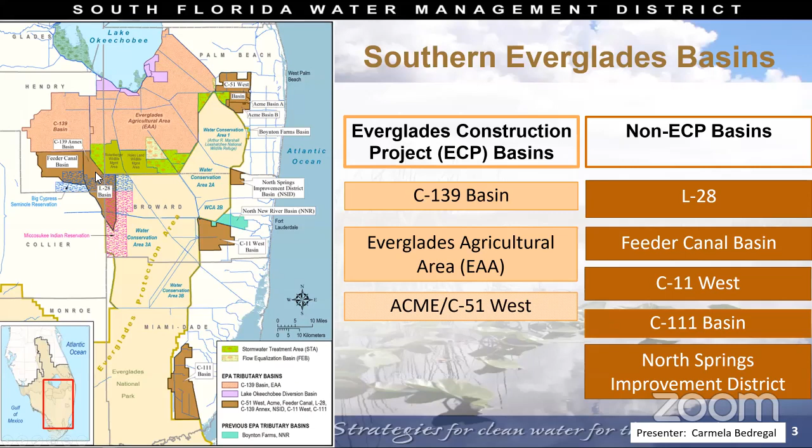To place these projects into the context of all the Southern Everglades tributary basins, please take a look at this map. The Lake Okeechobee is here, the Everglades Agricultural Area to the south, and to the southwest is the C-139 Annex Basin. The Flow Equalization Basin, the Sam Abiaki Prairie Restoration, and the Western Everglades Restoration Project, WERP, will benefit 3 of the Southern Everglades Basins. The C-139 Basin, which is located here, the L-28 Basin, and the Feeder Canal Basin.

So how will water quality be improved? And for that, we need to look at the hydrology of the Western basins, how water flows from one basin to another. So this map is similar to the previous maps that you have seen, except that it indicates main surface water structures and canals. And let me get my pointer option here. So the C-139 basin to the north is here, and the southern portion of the C-139 basin flows to STA 5/6 from the north and from the west.

Next is the Feeder Canal Basin. The west part of the Feeder Canal Basin flows to the southeast and discharges from the area at the west weir. The north part of the Feeder Canal Basin flows south and discharges through the structure PC-17A. Discharges from the north of the Feeder Canal Basin and the west of the Feeder Canal Basin mix and travel through the Seminole Big Cypress Reservation, finally discharging from the Feeder Canal Basin at S-190.

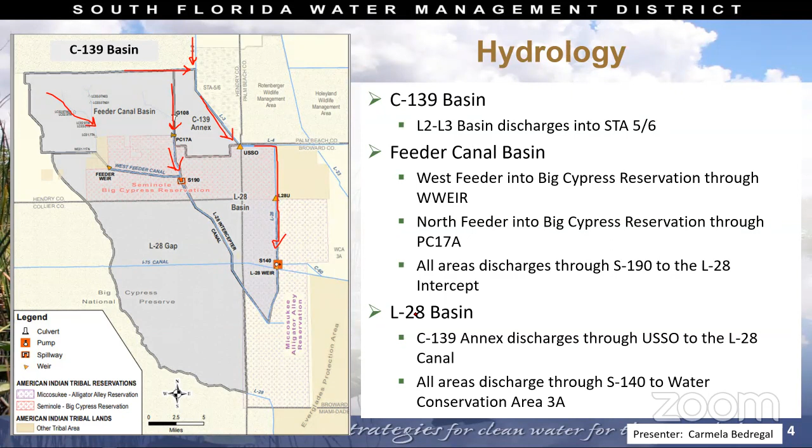Finally, let's talk about the L-28 Basin, where the C-139 Annex property is located. The C-139 Annex discharges south, and from there, it discharges into the rest of the L-28 Basin at the USSO structure. Water further flows south and discharges to Water Conservation Area 3A at the S-140 structure. The projects that you will hear next will reroute or improve the conveyances that you see on the screen, resulting in water quality improvements.

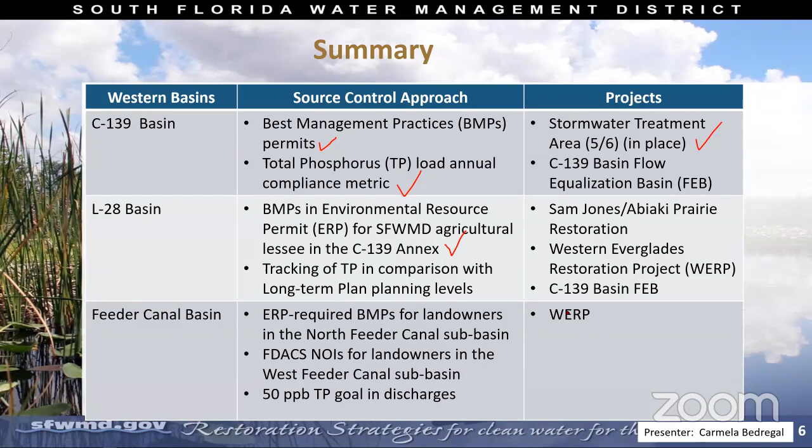So this completes my introduction. Additional detail on the activities conducted by the various entities in these basins is presented in the South Florida Environmental Report. And I don't know if I can take any specific questions or comments at this time, or we can leave those for the end. Thank you.

Thank you. Are there any board members who have a question? If you do, raise your hands and I'll recognize you. Okay, seeing none, let's move on. Great, thank you.

And next we're moving to current and future projects with Jesse Van Eyck, who's the lead engineer and construction manager for the Engineering and Construction Bureau. Jesse? Good afternoon, governing board members. Thank you for your time and opportunity to present on this great project. My name is Jesse Van Eyck. I am a lead engineer and construction manager in the Engineering and Construction Bureau. I'm also the project manager for the C-139 Annex Restoration Project that we'll be discussing today.

First off, one of the first things you'll notice that's different is sometimes you hear C-139 Annex Restoration Project and the Sam Jones Abiaki Prairie Project. I'll clarify that a little bit later in the presentation, but I do want to acknowledge that the screen says something different than what I just said.

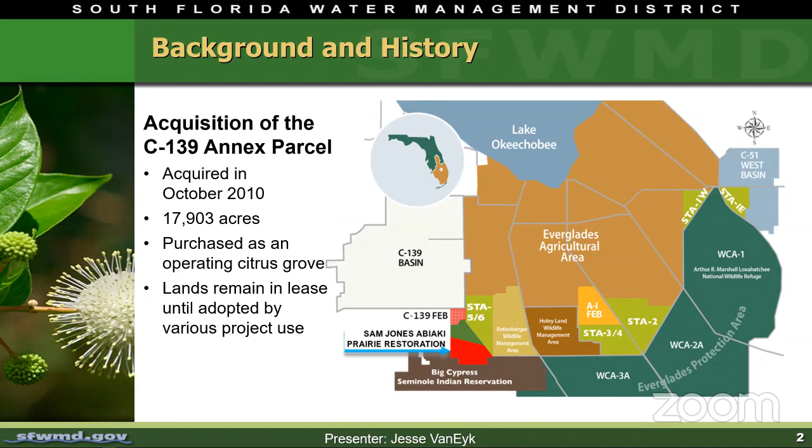That green area is labeled as leased agricultural lands. And as I said before, those are citrus groves that were remaining in lease until we can appropriate those lands for another use. And one of those other uses right now is a potential STA under the Western Everglades Restoration Project. So that green area is about 6,600 acres that's available for future land use. And the Sam Jones Abiaki project is about 7,800 acres.

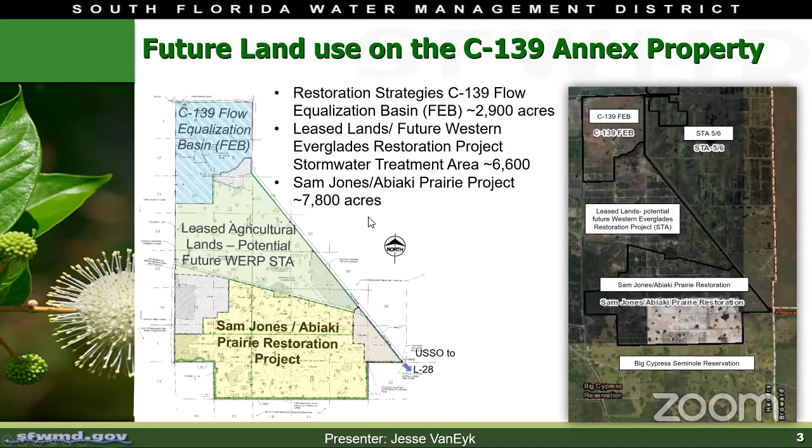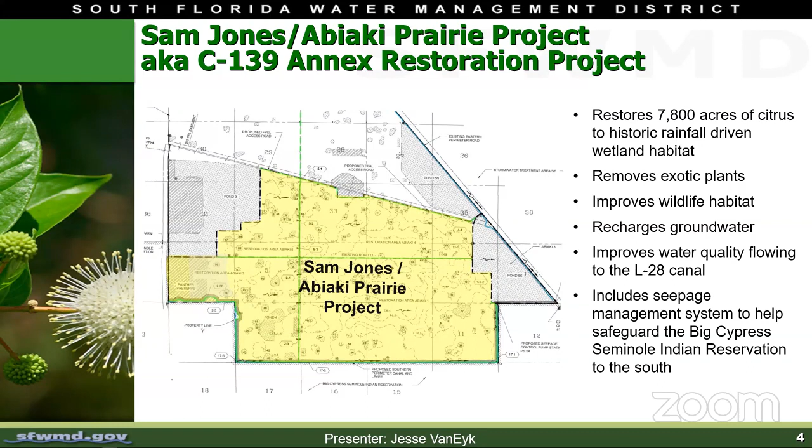And that came straight out of the fall 2013 volume of the Ah-Tah-Thi-Ki Quarterly magazine. This is a tribal magazine put out by the Tribal Museum. It's primarily located on the Big Cypress Reservation.

So who was Sam Jones? Sam Jones was kind of like a spiritual leader for the tribe. He was a leader during the Seminole Indian Wars, and he was notorious because he refused to surrender to the U.S. Army during the wars, and he was actually never caught.

So he was able to safeguard a number of people from the U.S. armies and move them out of sight and really kind of keep the distance. So for that reason, he became a legend in tribal history. And so we're honored to have this property named after him.

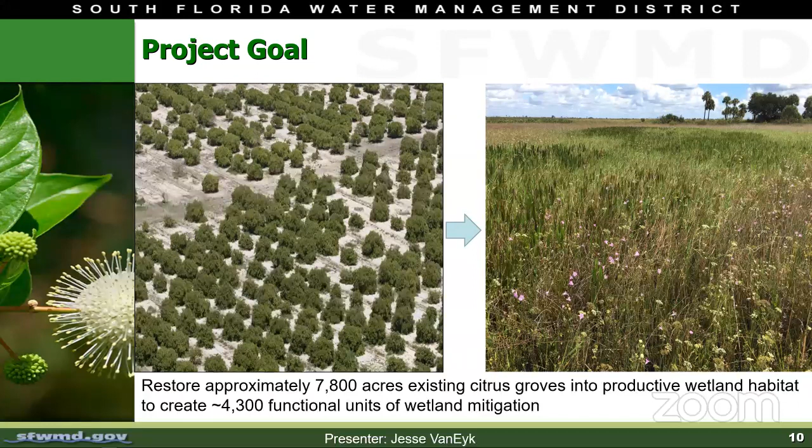I say that because by the time we're done with this project, we will have in some way had human contact with just about every square inch out there. This is a restoration project. So we literally have to walk this by foot, turn each bed over by hand practically, and replant this site. So it's quite involved. And that's really why I want to focus in on what the scale of this project is. Because after you look at these things on paper a few times, you start to lose that perspective of size.

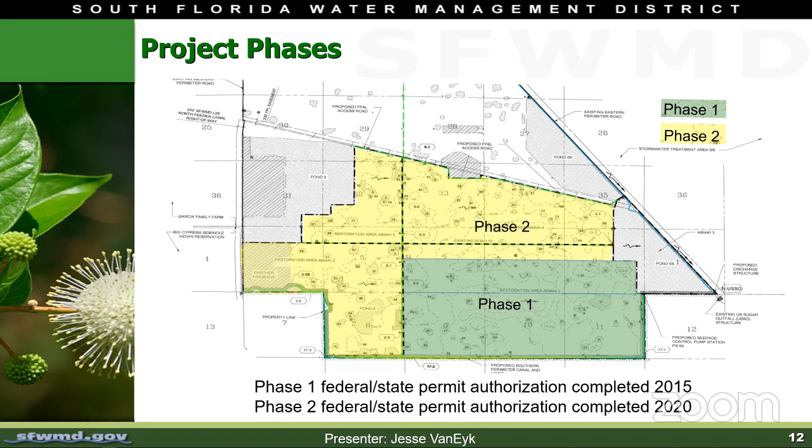And while we were doing that, we also were applying for and coordinating with all the various agencies to obtain our permits by 2020, just recently completed this year. And that's really important because this has taken us a very long time just to make sure we coordinate and we get it right. So we started in 2013 and have gone through this all the way to 2020, 7 years of permitting.

So planning approach, Citrus Grove to a restored wetland. I'm not going to go through every step here, but this is to give you an idea what it takes to take a citrus grove and turn it into a wetland. We have about 27, 28 steps here outlined. And that phase 1 effort took us to step 18. So in the 5 years that we've been working in phase 1, we got to step 18. And now that we have our permits for phase 2, we'll take it through step 27 and we'll repeat this step for every acre that's out there.

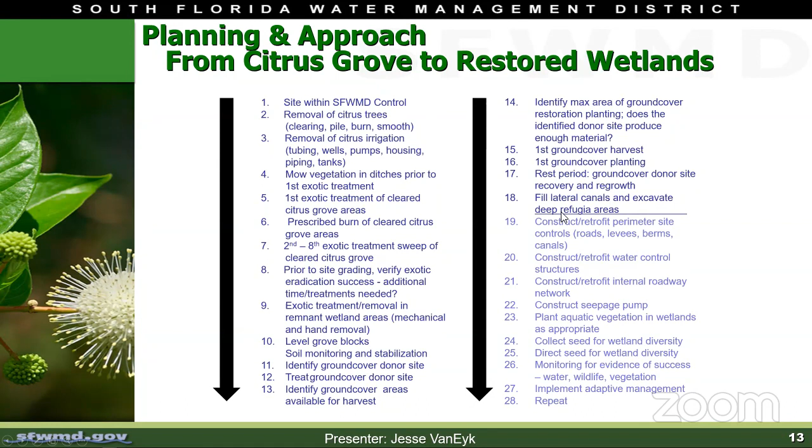So what goes into this overall design that's coming forward in phase 2? Well, in phase 2, we'll build our seepage management system, which will include a seepage pump station, as well as 3 step-down weirs and a road at the north end of the property, which is that dotted blue line at the top. Those features will essentially bound the project and give it some walls. And those walls will contain the restoration area. To do that, we'll also have to redivert some water that came into this area, which I'll cover a little bit later.

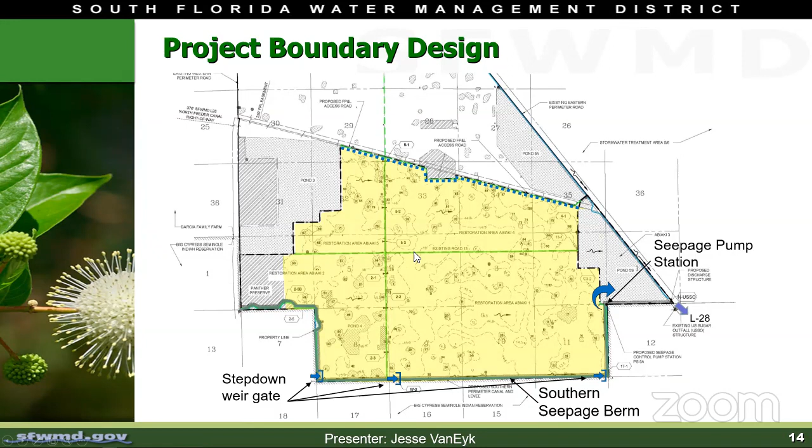On the inside of those restoration components, we have this slide again, which I showed you earlier, phase 1 and phase 2. On top of that, we have these restoration areas. As I mentioned earlier, phase 1 was just a component of the project. And you can see in restoration area 1, or Abiaki 1, that the green area doesn't quite fill in this whole Abiaki 1. We have a little strip left that we need to do, as well as build some of that infrastructure on the south end. So again, that was one piece of the overall puzzle.

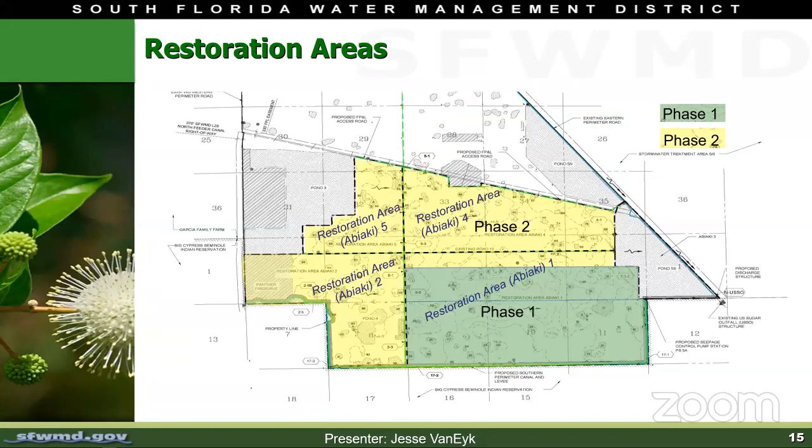I mentioned we had to redirect some water. While the FEB is up here at the north end, I'm not going to focus on that. That project is already underway, and it's going to re-divert this water that's currently up there. And by water, I'm referring to the stormwater. So currently, the way that the Citrus Grove had this set up, I'll focus on area 3 and pond 3, which is in this diagram here. Area 3 used to flow from the west side of the site to the east to a common header canal. Then it would move south into our future restoration area and get pumped into pond 3.

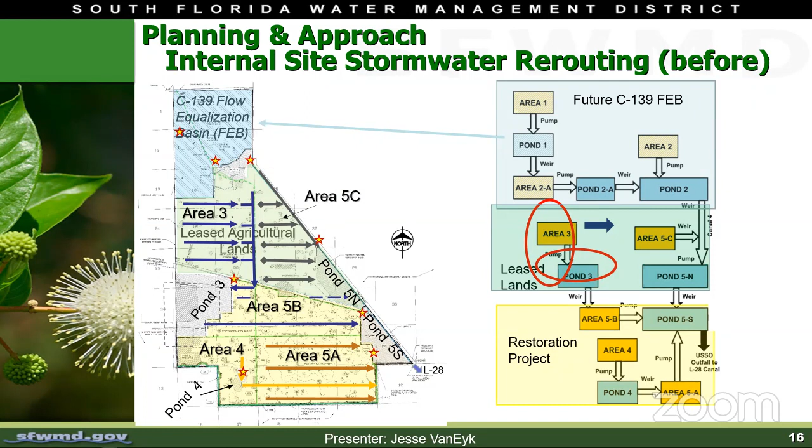When pond 3 would fill up, it would overflow and discharge across the site through a canal and get pumped into pond 5 south. From pond 5 south, it would move to L28 through the USSO structure. And this is the headwaters of L28. So we obviously don't want the stormwater from the leased lands area or the future WRP area moving down into our restoration project and crossing it and interfering with the project. So we need to reroute that. Luckily, we have a lot of existing infrastructure at our disposal, so we can redirect that water pretty easily.

So I mentioned we had the seepage controls before, but now we need to move water a little bit differently. So we're going to install these 4 fixed weir culvert risers. Those risers will enable us to move that water from the west to the east side of the site in the green area and have it pumped into an above ground impoundment, which will then flow through an interconnect weir that we'll construct and into pond 5 south and down to L28.

While I'm on this, the restoration project will also have several gravity structures, and the water will similarly flow from west to east by gravity through several gravity structures, and any excess water that is above and beyond the norm will flow by gravity out to pond 5 south and out through L28.

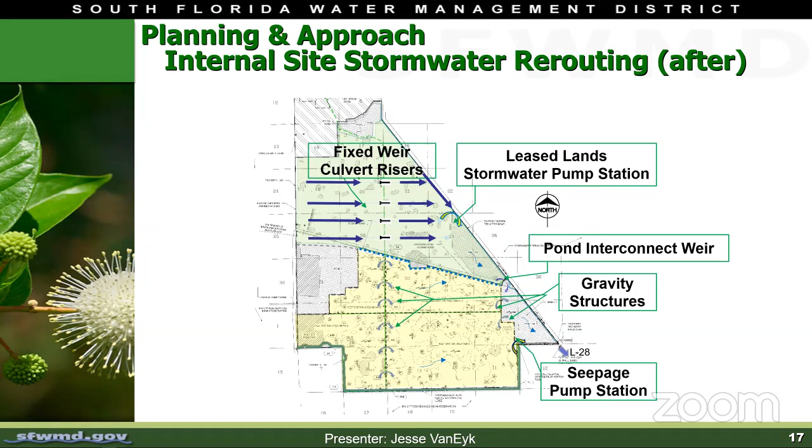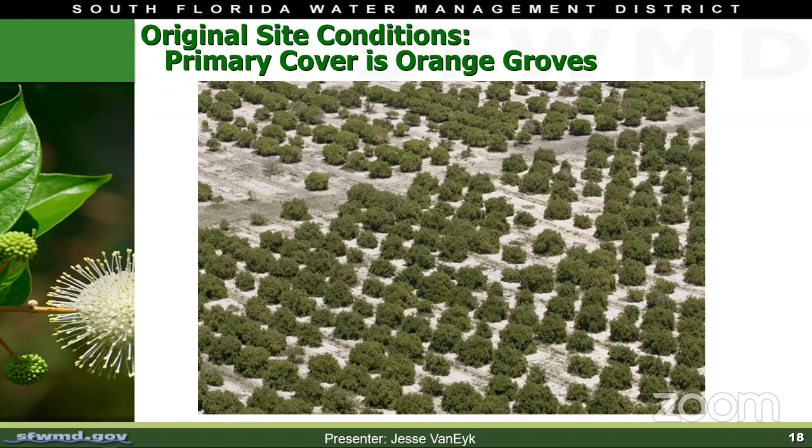This was a method approved by FWS during a pilot study we did back in May of 2015. And it proved to be an excellent way of identifying any concerns they had, but it also gave us the ability to not laser level the site, but instead to reverse engineer the site and simply restore what was pre-existing. And restoring that pre-existing condition allowed us to return the underlying microtopography, that nuanced topography, which we'll show you a little bit later today.

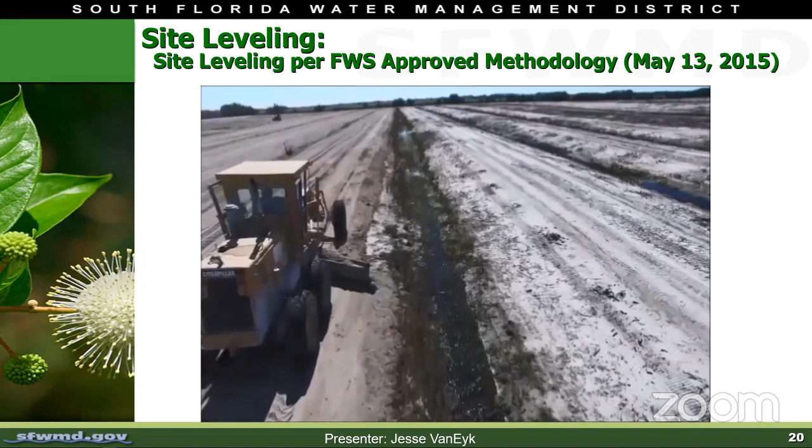We also start to remove the drainage features that are on the site. I mentioned those ditches earlier, and those ditches are conveyed to these black culvert pipes and drain the farm bed. So we start removing all that black 8-inch culvert pipe and removing those farm bed drainage features. Because again, we're no longer farming citrus anymore. We're now working towards restoring these lands as a mitigation project.

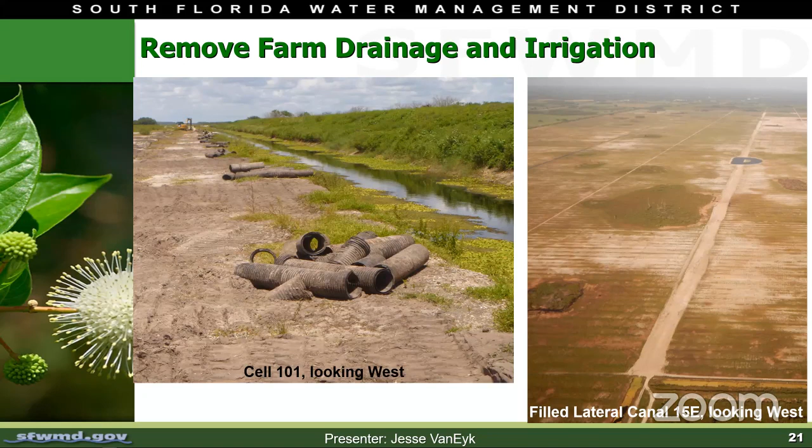So once we remove these culverts, we then start filling the farm bed lateral canals, these larger conveyance canals that were meant to divert stormwater away from their citrus trees. We filled one canal, lateral 15E, and I'll talk about that in a little bit, to date as part of our pilot study, because that canal was no longer needed for any kind of on-site water management. It was simply dedicated to the farm beds.

And in doing that, we were able to create a rookery with an island in the middle. And Rob's going to talk about this a little bit more later, so I'll leave that for him.

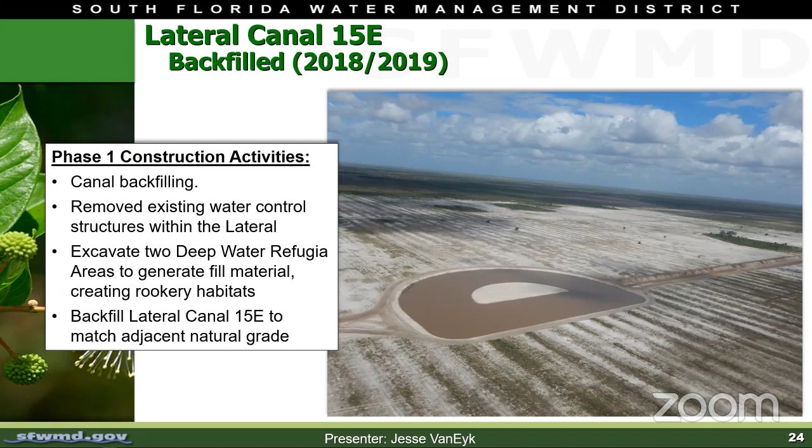And this is our method moving forward for generating fill material for filling our canals. Here's a photo from the ground of what that looks like on site. So the equipment in that photo is sitting in the island still. We haven't finished digging out the island. And you can see the moat that we've started to build. It's a pretty good size.

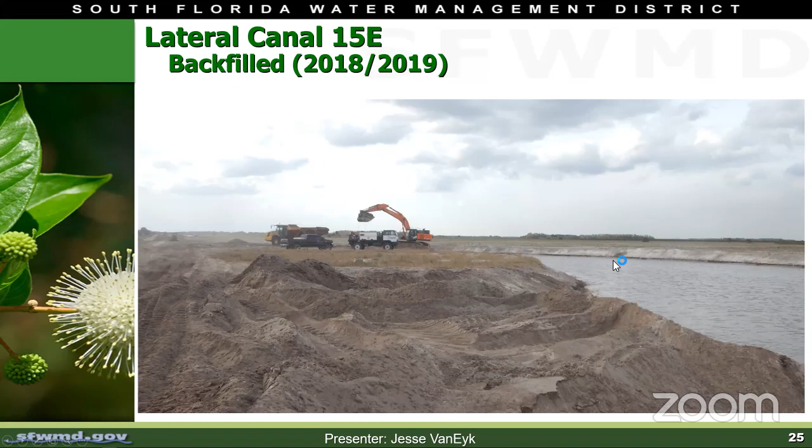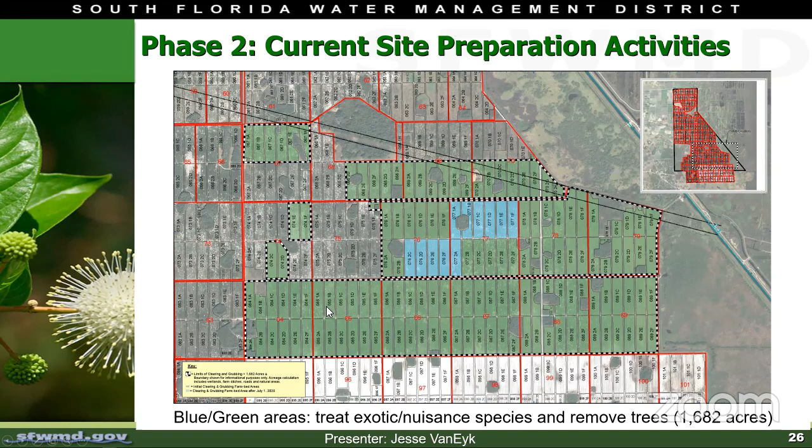Tomorrow, you'll actually have an item under consent for a change order to add some additional acres to the west for your consideration. We'd like to expand on this clearing effort just to keep the project going and ahead.

Moving forward, as I mentioned, we'll need to continue to backfill those remaining lateral canals that are throughout the phase 2 area. We'll have to modify that surface water system and decommission those existing ag ponds like I noted in pond 3. We'll construct the seepage management system that we talked about earlier. We'll also replace the existing discharge structure or USSO structure with a new G771 structure. That's a new structure that will be located in the same vicinity and it'll follow the district's naming convention instead of the old purchase convention.

We'll also clear and level ag beds and install water control structures. We'll continue to decommission those actively used irrigation wells, as well as plant with appropriate native vegetation, and we'll continue our exotic removal and monitor and adapt as needed as we go on. And we expect all this to be completed in 2028.

So with that, I'm going to turn over my presentation to my colleague, Rob Hopper, who will discuss some of the wetland and vegetative functions.

Good afternoon, everyone. My name is Robert Hopper. I'm a senior scientist with the Land Stewardship section here at the district. And today we're going to discuss completed items in phase 1.

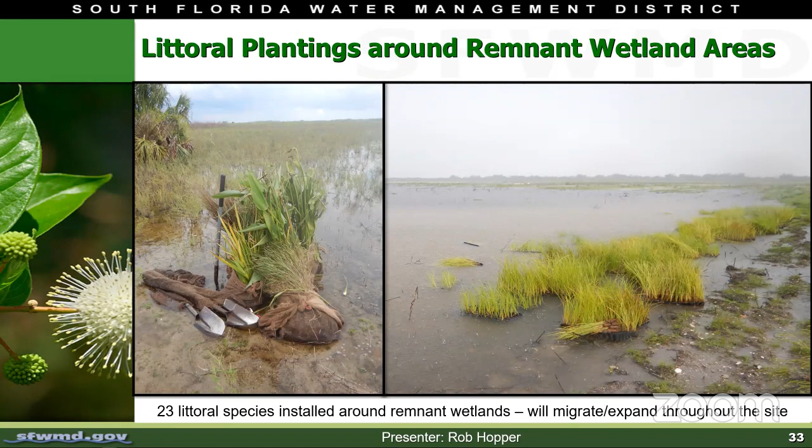Wildflower and diversity plantings. Unfortunately, many wetland plants have been eliminated from the site due to years of agriculture. So what we really need to do is restock Mother Nature's pantry. What staff does is we collect seeds from district natural areas and we grow these out to inoculate the site.

You can see some photos here on the left of some of the wildflowers that we're planting on the site. We've planted 41 species of wildflowers to date. And on the right slide, you can see some of the grasses we're planting. We've established about 11 species on site at this point as well.

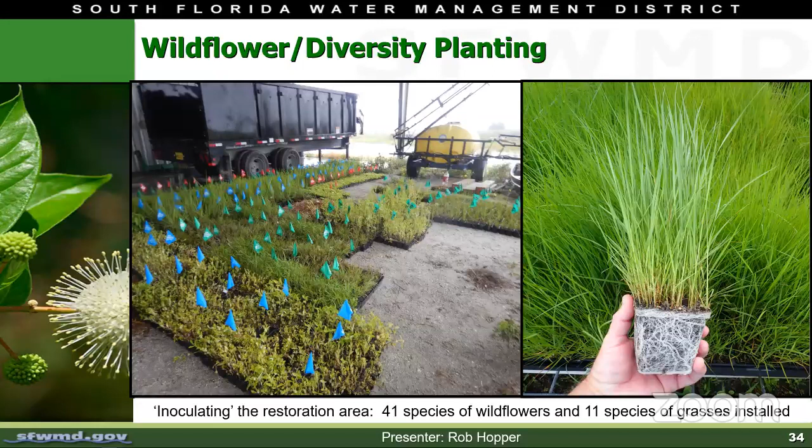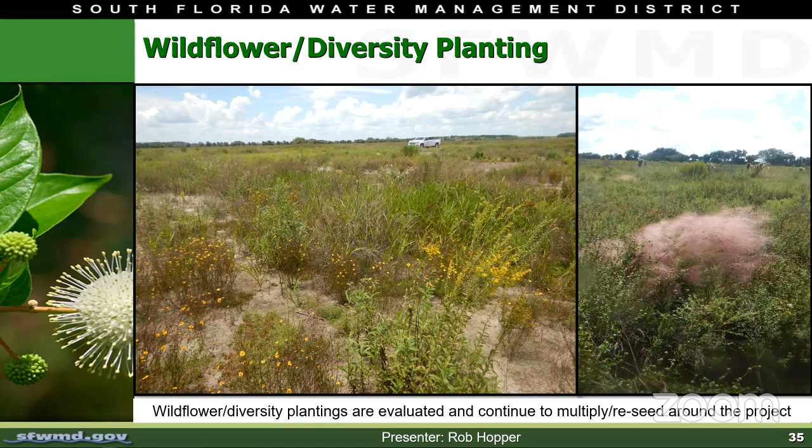And in fact, on the slide to the right, you can see this happening. Those pink cotton candy plumes are on a muhly grass plant that's actually reseeded itself on the property. So that's very encouraging.

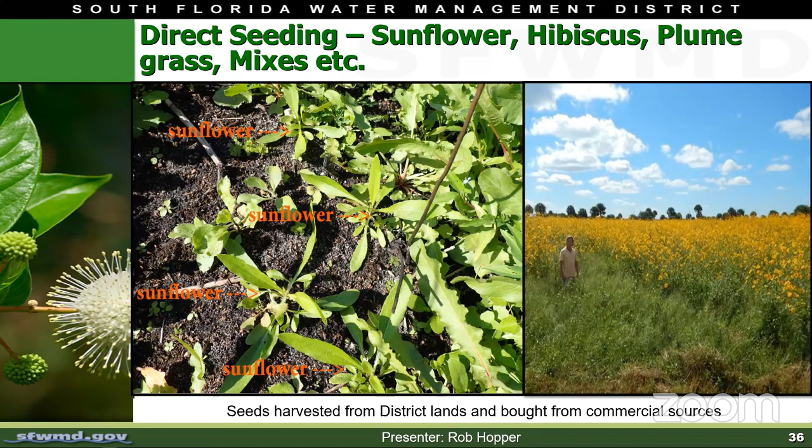The next topic is wildlife. So turning construction areas into wildlife habitat. We're always looking for ways to include biology in the construction process. And in this case, we're looking for opportunities to not just create bird foraging habitat like we saw at the beginning of my presentation, but also to create bird breeding habitat.

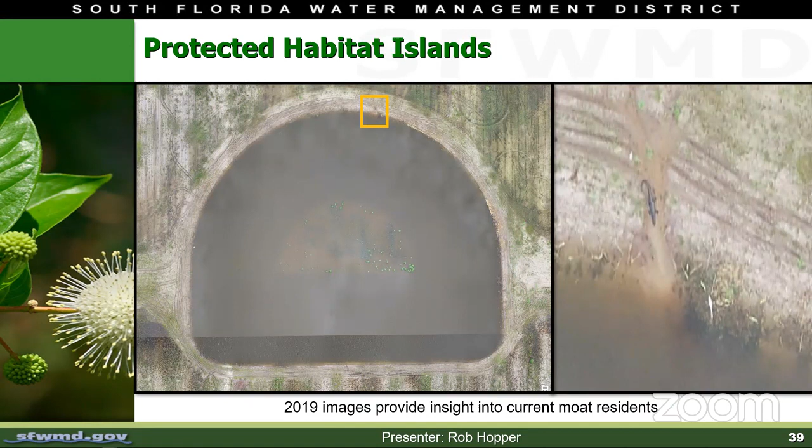So Mr. Chairman, that concludes our presentation. We'd be happy to answer any questions. Thank you very much, Jesse and Rob. Great presentation, very interesting. Are there any questions from any board members on this? All right, I don't see any raised hands right now. We may come back to you if we do have some more questions, and thank you very much for your presentations. I want to remind the public that we'll have time for public comment at the end.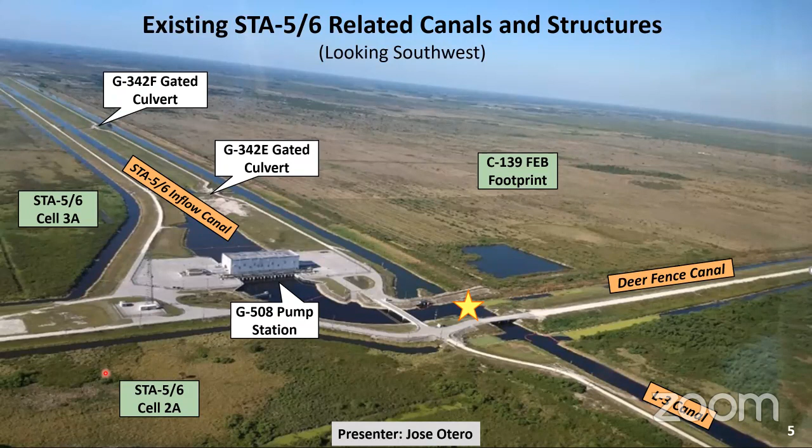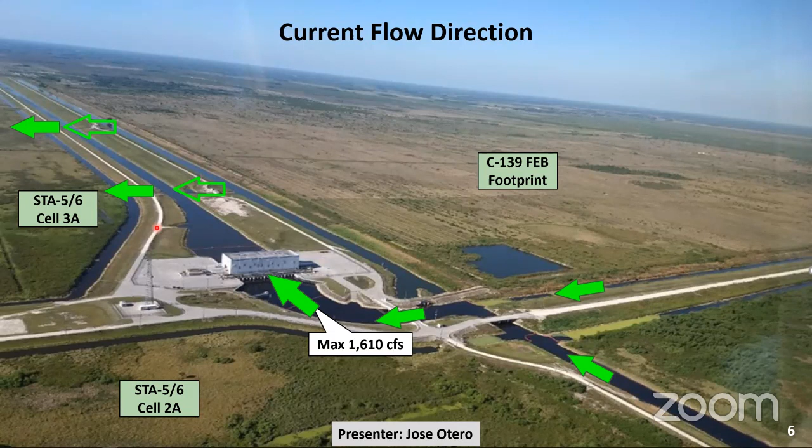The current flow patterns allow runoff from areas to the west along the Deer Fence Canal and areas from the north served by this L3 canal and the L2 and the L2 West canals to be conveyed to this location and directed towards the G508 pump station. As the water is lifted by the pump station into the STA inflow canal, it flows into these and several other flowways to the south for treatment. Water that is treated in the STA is discharged into STA 5/6.

Outflows: once the water is lifted into the FEB, it will take a long route guided by an interior berm before exiting the FEB. And those outflows will be conveyed across the L3 canal and into the STA inflow canal to gravity flow into flowways here and to the south.

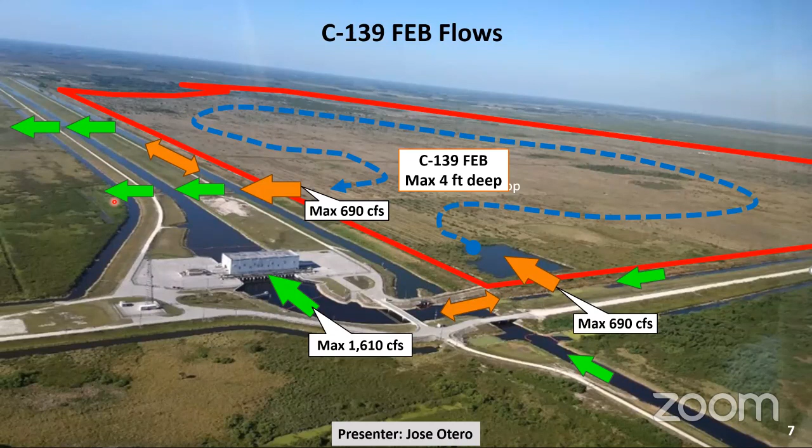Design also includes a seepage ditch along the south and west exterior levees to protect adjacent interests. And a structure along the Deer Fence Canal called the G711 structure will be relocated just to the east. And that seepage ditch will discharge downstream of that newly relocated G711 gravity structure.

The FEB will have an approximate storage capacity of 10,500 acre feet at its maximum storage depth of 4 feet. The inflow pump station will have a maximum capacity of 690 CFS with 6 pump units, each of 115 CFS. This provides a greater flexibility for handling runoff. The outflow gated spillway is a 2-gated structure and also has a capacity of 690 CFS.

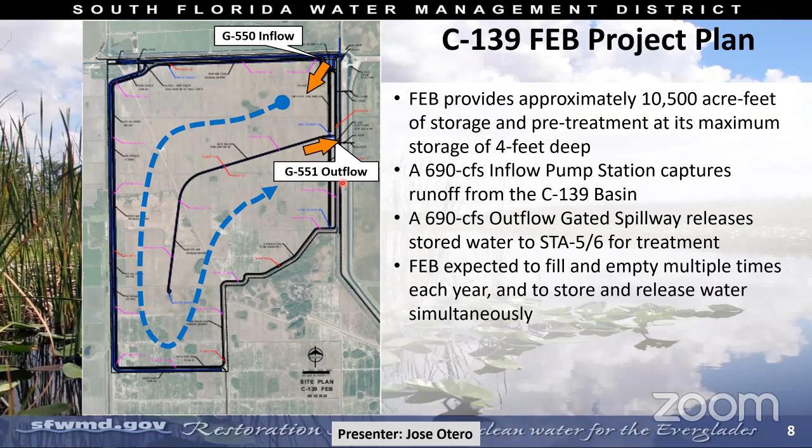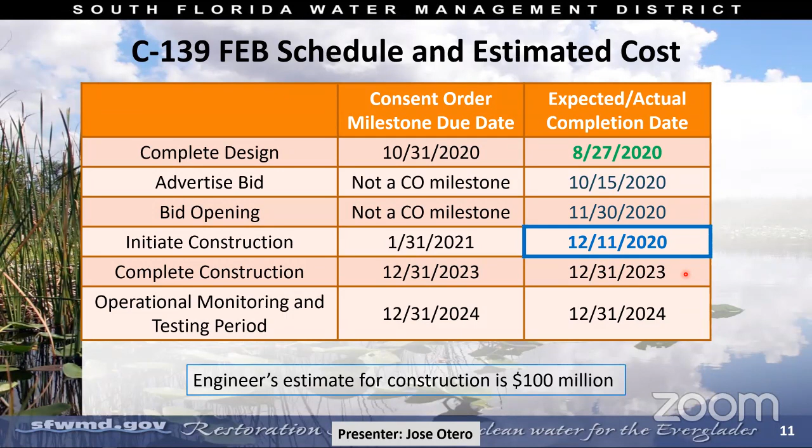And I'll be happy to take any questions. Thank you very much, Jose. If anyone has any questions, and I see Mr. Steinle, you have your hand raised. Go ahead. Thanks, Mr. Chairman. Thanks, Jose.

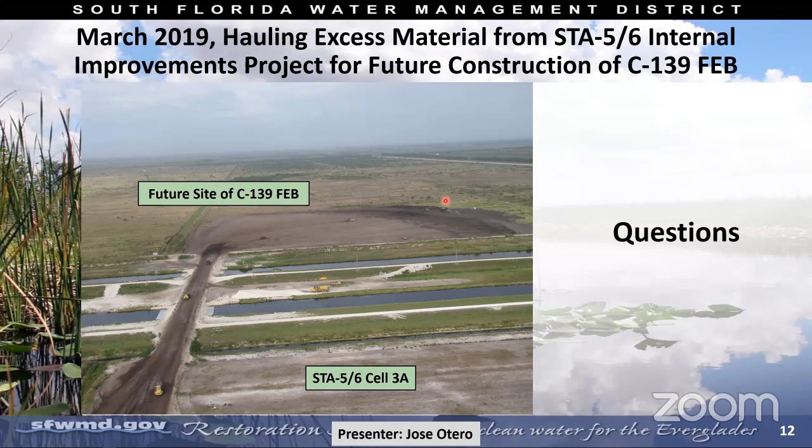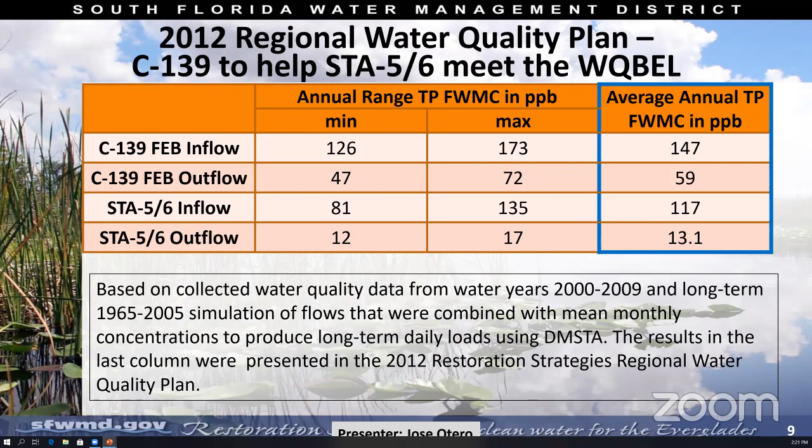And so this is actually almost not a long enough time period to really help illustrate how significant that relationship is. And that's part of why an FEB in this area is such a critical portion of making STA 5/6 optimize its operations. And so as we talk about these projects in the future, I will make sure that we bring additional information to help answer these questions for the board. Jennifer, thank you very much.

I am certainly not gun shy about doing the flow equalization basin. Everything that's been presented clearly goes to the heart of helping STA 5/6 do what it needs to do from a variety of different functions. I just want to make sure that before the train leaves the station, at least for me, it'd be comforting to know that it doesn't need to get beefed up. Do we need to give it something else to help? Is there more we can do? Or is this the best we can do?

We'll move on now to section C, which is the Western Everglades Restoration Project. Mindy Parrott, Lead Project Manager for Ecosystem Restoration and Planning Bureau. Good afternoon. Thank you for this opportunity to talk to you about the Western Everglades Restoration Project, otherwise known as WERP. I'm the district's project manager for the WERP, and I'm going to focus today on how the WERP may affect the C-139 Annex and the L-28 basins that you've heard about previously.

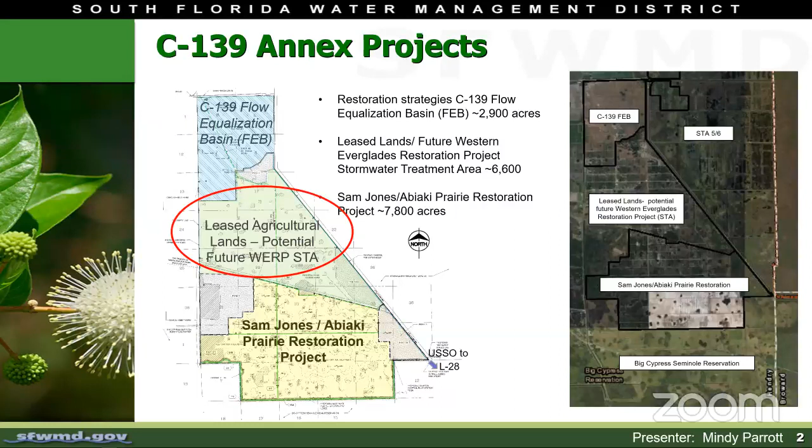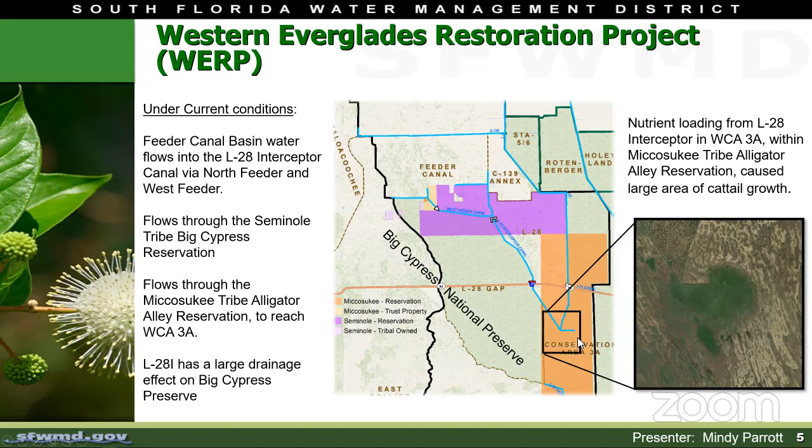So WERP's alternative HR proposes several actions to address these issues and improve these conditions consistent with WERP objectives. First off is filling of the L-28 triangle canals and removing the levees. This will improve connectivity, restore hydrology, decompartmentalize the system, and improve and restore habitat. There is also included vegetation restoration in the 2 areas I mentioned that have experienced cattail overgrowth due to nutrient loading.

The L-28 would be blocked off from flow so that no flows would leave the canal, and there would be a weir installed to better manage that water as it's coming down the canal. Effectively, the L-28 interceptor would be converted into a retention area. In order to do this, most of the flows coming into the interceptor canal must be reduced, and this is accomplished in alternative HR by features upstream of the west feeder and north feeder canals.

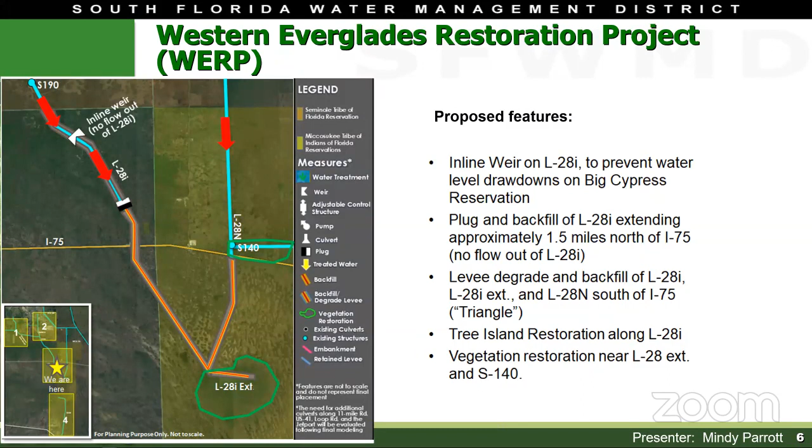We have current high water levels in 3A. Those 3 culverts he estimates and John estimates to be $4 to $5 million for 3 culverts. And that would get an additional 1,500 CFS out of Conservation Area 3A. So right now, there is not a tentatively selected plan that has been finalized as part of Western Everglades, but he is very much championing and asking me to engage the Corps of Engineers on what we would need to do to move out on those 3 culverts ahead of schedule.

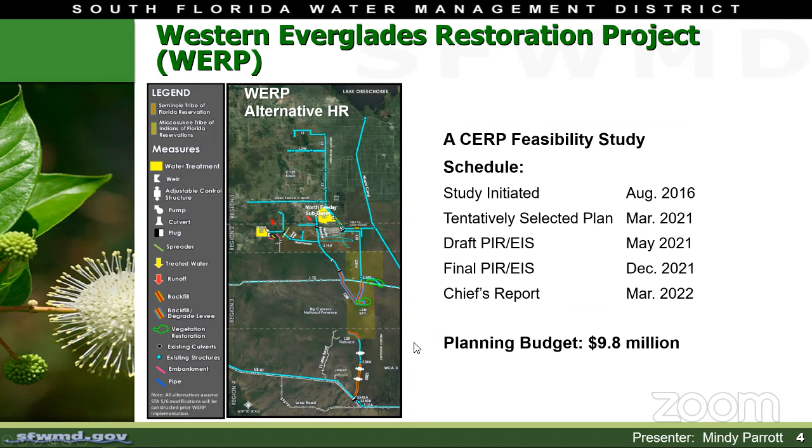Any more questions? I have one, and I apologize for being sort of out to lunch on this one and not just having this question now. It goes back all the way to the Sam Jones Abiaki Prairie projects, and that discussion. What are we looking at for dates of completion on those? Hi, Chairman. This is Jesse Van Eyck. I think I can answer that.

So our completion date for the restoration project is scheduled for 2028. And that is all the construction will be done and the bulk of our plantings will be done. There'll be a period of, I'll call it a burn-in process, for about 5 years where we have to monitor and check and make sure that the plants are taking off after that. But the construction will be done by 2028. Great, thanks very much.